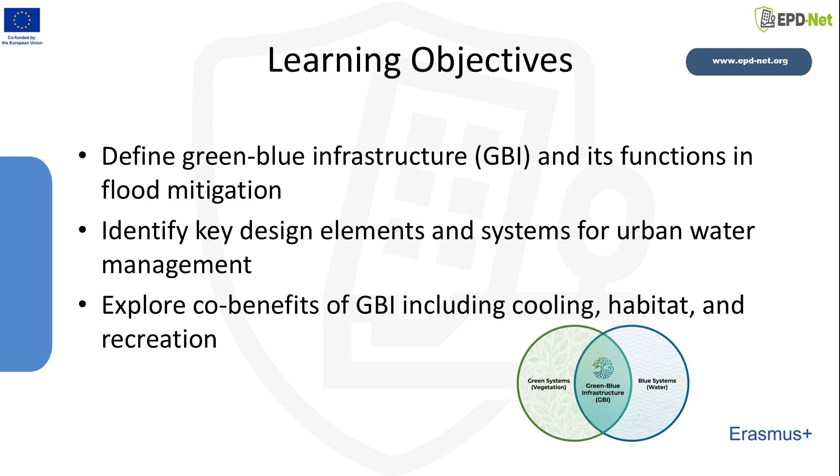Second, key design elements and systems for urban water management are identified. The integration of nature-based and engineered approaches is discussed in relation to contemporary flood control strategies.

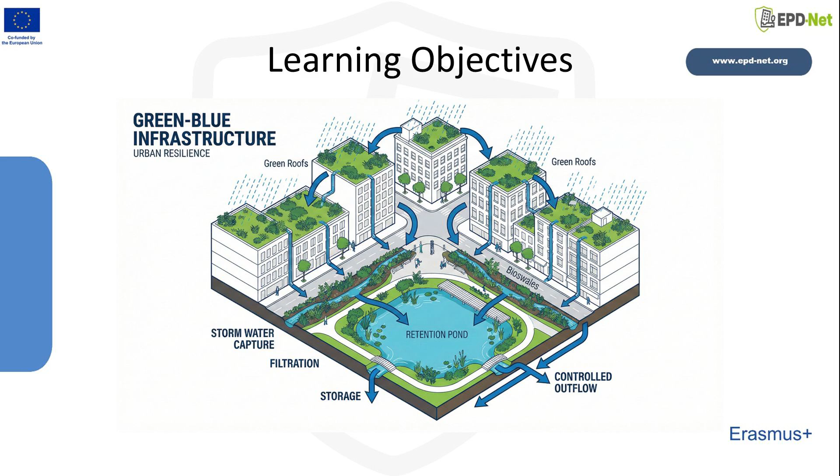Third, the broader co-benefits of GBI are examined, including urban cooling, habitat provision, and recreational value, highlighting its multifunctional role in sustainable urban development. This slide introduces Green-Blue Infrastructure, GBI, as a holistic approach to urban water management.

GBI deliberately integrates vegetated systems, green, with water-related features and management systems, blue. Instead of treating stormwater as waste to be rapidly conveyed away, this approach works with natural hydrological processes to slow, store, filter, and absorb water within the urban landscape. It represents a shift from conventional grey infrastructure, such as pipes and concrete channels, toward nature-based solutions that mimic ecological functions.

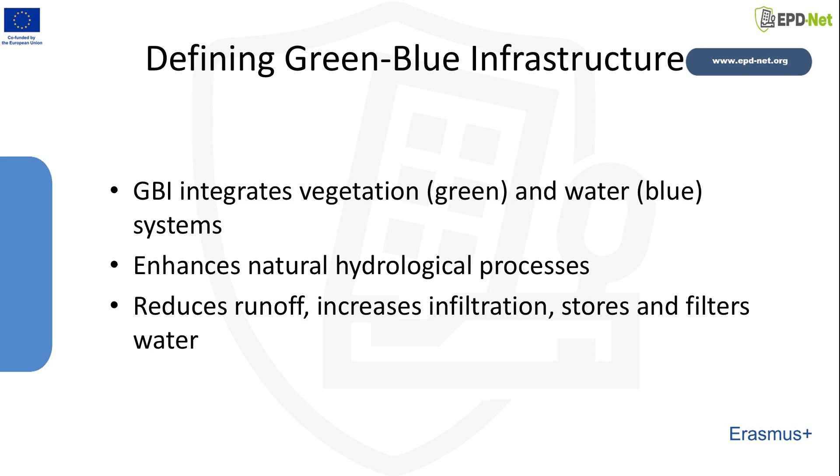The green component includes trees, shrubs, grasses, and wetland vegetation, as well as green roofs, bioswales, vegetated swales, urban forests, street tree canopies, community gardens, and parks designed with infiltration capacity.

The blue component consists of rivers, streams, and restored floodplains, along with retention ponds, urban canals, constructed wetlands, permeable surfaces that enable groundwater recharge, and rainwater capture and harvesting systems.

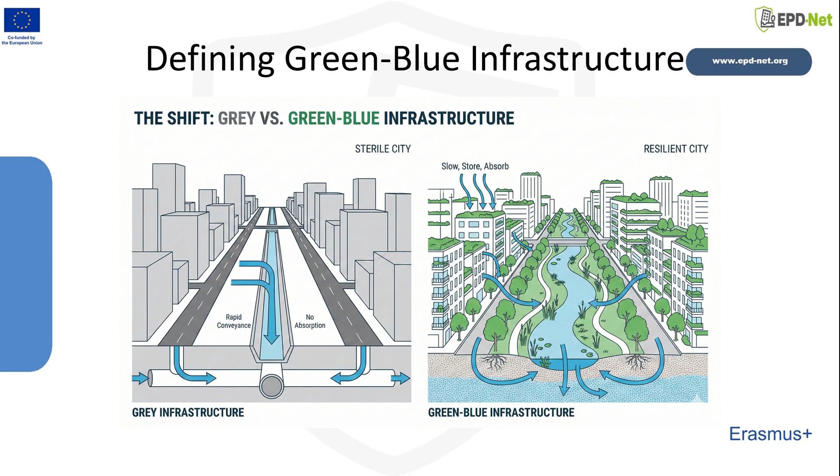Together, these integrated systems enhance natural infiltration, reduce peak runoff volumes, improve water quality, and generate long-term ecological and social value within urban environments. For much of the 20th century, urban water management was shaped by a convey and remove philosophy.

Stormwater was treated as a problem to be eliminated quickly through pipes and drainage systems. This led to the widespread construction of underground networks, concrete-lined channels, and engineered levees. Although effective in certain contexts, conventional grey infrastructure presents important limitations: high construction and maintenance costs, limited flexibility, and the absence of ecological or social co-benefits.

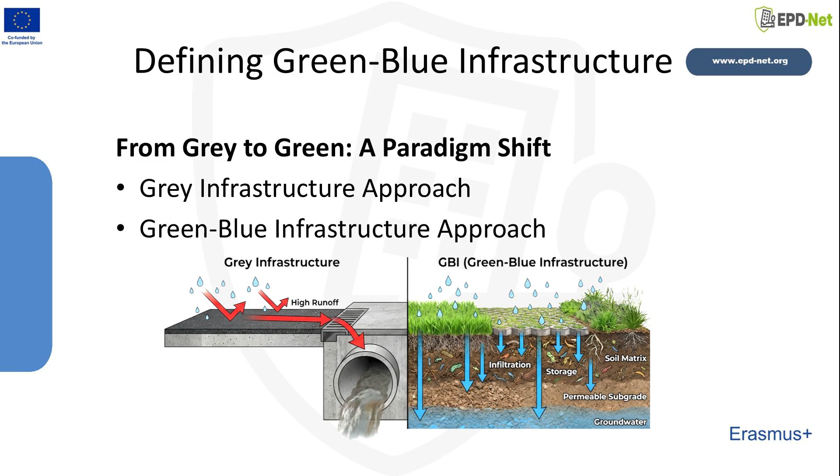The grey infrastructure approach rapidly conveys water away from urban surfaces and relies heavily on pipes, concrete channels, and underground storage tanks. Its capacity is fixed at the time of construction, making adaptation to changing climate conditions difficult. In addition, it contributes little to urban quality of life and may intensify the heat island effect.

In contrast, the green-blue infrastructure approach manages water at its source. It slows, stores, infiltrates, and treats runoff through the use of vegetation, soil systems, and integrated water features. Life cycle costs are often lower when long-term environmental and social benefits are considered. Beyond flood control, this approach delivers cooling effects, biodiversity enhancement, recreational opportunities, and well-being benefits. It is also adaptable, scalable, and suitable for retrofitting within existing urban areas.

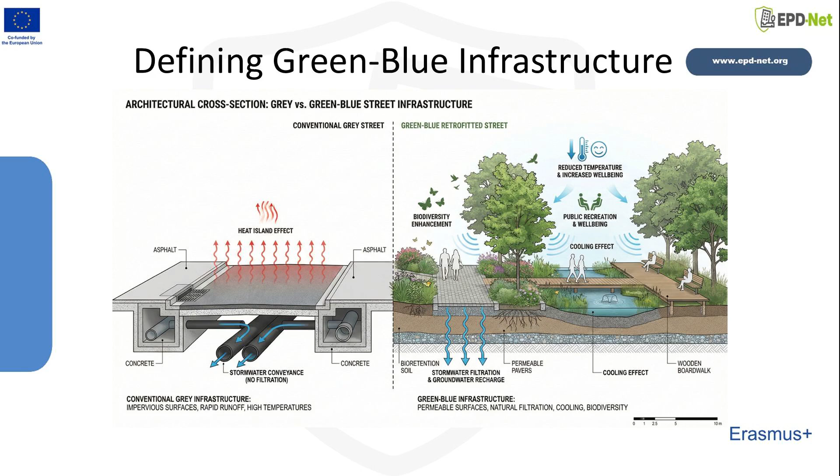The most resilient and effective urban water management strategies integrate elements of both approaches, combining engineered reliability with nature-based multifunctionality. While flood risk reduction is the primary driver for GBI investment, it is important to emphasize that the ecological co-benefits of well-designed systems are substantial. Municipal governments increasingly recognize these additional benefits as central to the overall business case for GBI.

These benefits extend across multiple urban systems, from public health and thermal comfort to biodiversity and urban food systems, which makes GBI one of the most multifunctional infrastructure investments available to cities today.

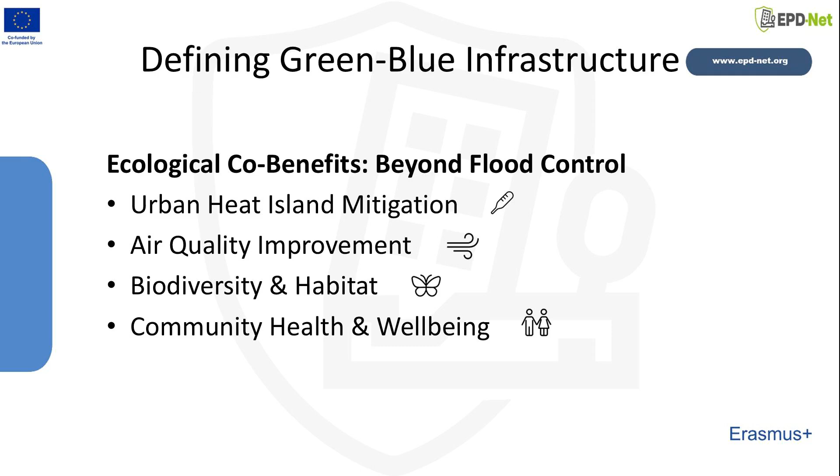Looking first at urban heat island mitigation, vegetation and open water surfaces reduce ambient temperatures through evapotranspiration and shading. Research indicates that GBI can reduce local surface temperatures by 2 to 8 degrees Celsius, which significantly lowers heat-related health risks and decreases energy consumption for cooling.

In terms of biodiversity and habitat, connected green-blue corridors function as ecological stepping stones. They enable the movement of birds, invertebrates, and small mammals across otherwise fragmented urban landscapes. Native planting within GBI systems also supports pollinators that are critical to urban food systems.

Regarding air quality improvement, vegetation in GBI systems captures particulate matter, absorbs gaseous pollutants such as nitrogen dioxide and ozone, and produces oxygen. This contributes to measurable improvements in urban air quality, particularly along high-traffic corridors.

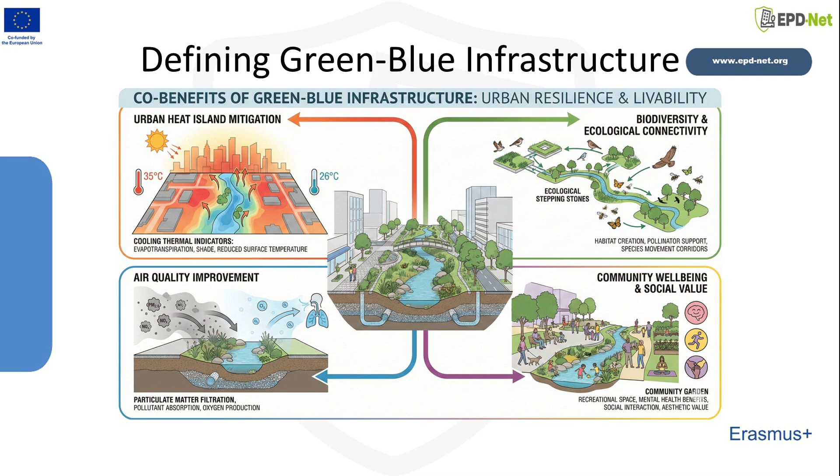Finally, community health and well-being outcomes are consistently linked to access to green-blue spaces. Evidence shows improvements in mental health, increased physical activity, and stronger social cohesion. In this way, GBI infrastructure creates public amenities that serve diverse urban communities across all demographic groups.

A well-designed GBI system relies on a diverse toolkit of landscape and engineering elements. Each element performs a distinct yet complementary function in managing urban water flows. These interventions can be implemented at multiple spatial scales, from individual buildings and parcels to neighborhood, city, and watershed levels.

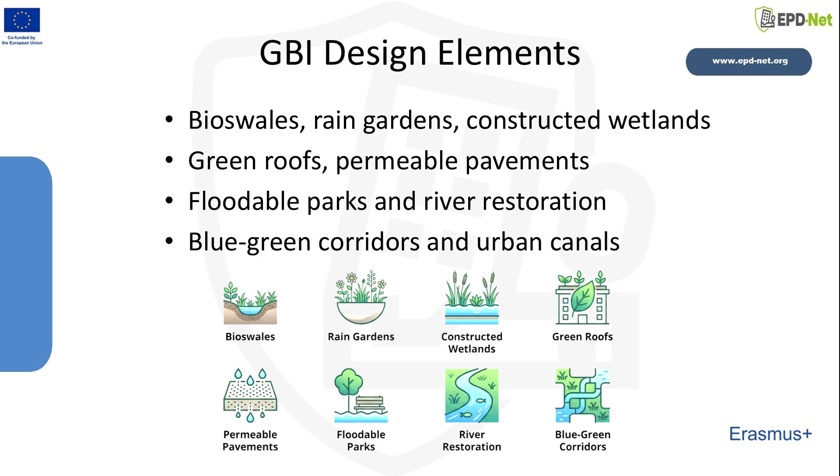Their effectiveness increases significantly when they are planned and connected as part of an integrated urban network rather than as isolated measures. This toolkit includes bioswales, rain gardens, and constructed wetlands, which slow, filter, and retain stormwater close to its source. Green roofs and permeable pavements contribute to on-site infiltration and reduce surface runoff in densely built areas.

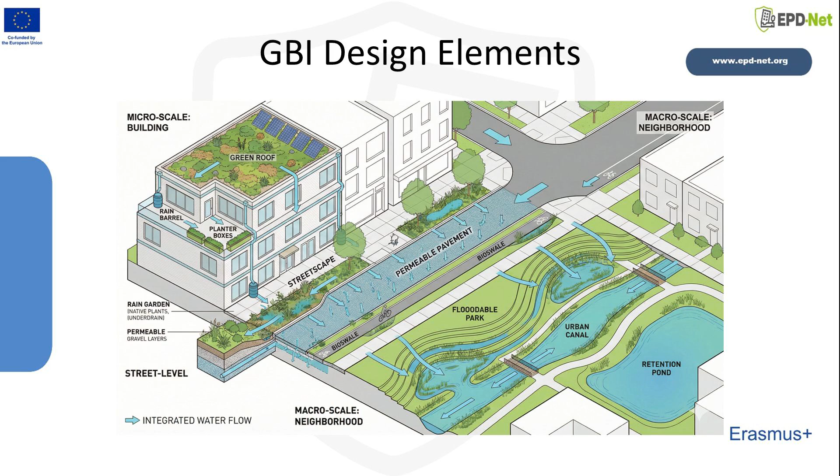Floodable parks and river restoration projects create space for water during peak events while enhancing ecological quality. Blue-green corridors and urban canals strengthen hydrological connectivity across the city and support both environmental performance and public amenity. Together, these design elements form a flexible and scalable framework for sustainable urban water management.

In this slide, the focus is on two key GBI design elements: bioswales and rain gardens, along with constructed wetlands. Bioswales and rain gardens can be understood as shallow, vegetated channels or bowl-shaped depressions. They are specifically designed to slow down, filter, and infiltrate stormwater runoff coming from roads, rooftops, and other impervious surfaces. In practice, they are considered among the most cost-effective GBI solutions, particularly in retrofit applications within existing urban neighborhoods where space and budgets may be limited.

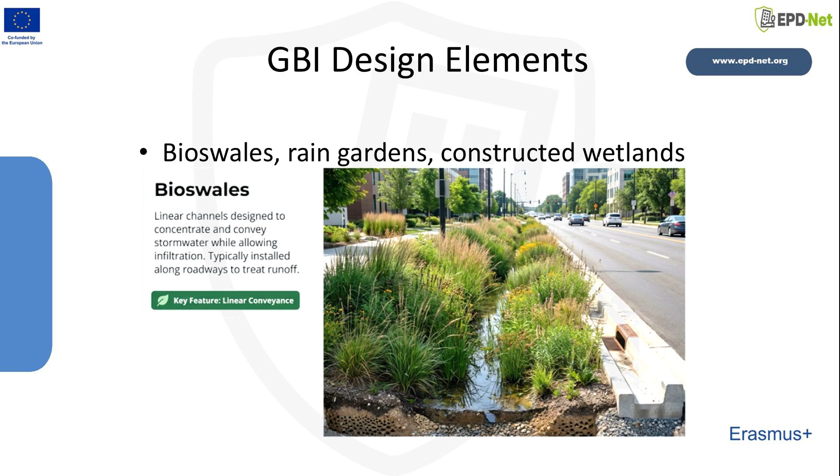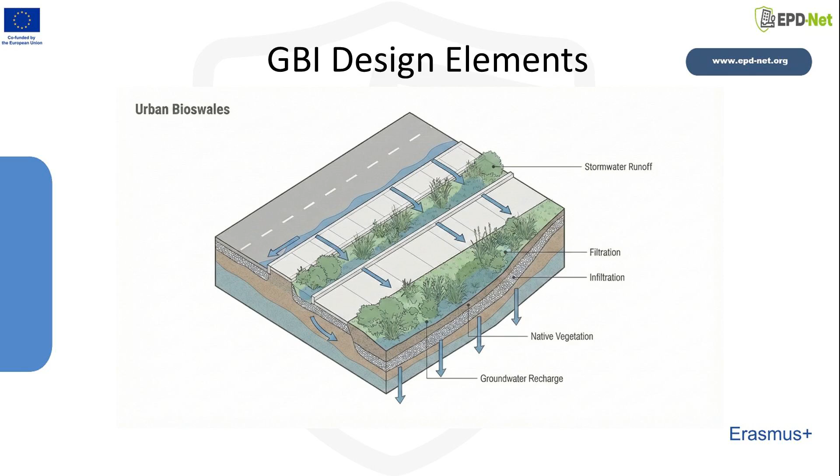Constructed wetlands, on the other hand, are engineered shallow water systems planted with emergent vegetation. Their primary function is water quality treatment. They remove nutrients, sediments, and pollutants from stormwater runoff before it enters receiving water bodies. At the same time, they provide significant habitat value for birds, amphibians, and invertebrates. In this way, they not only contribute to stormwater management but also actively strengthen urban biodiversity.

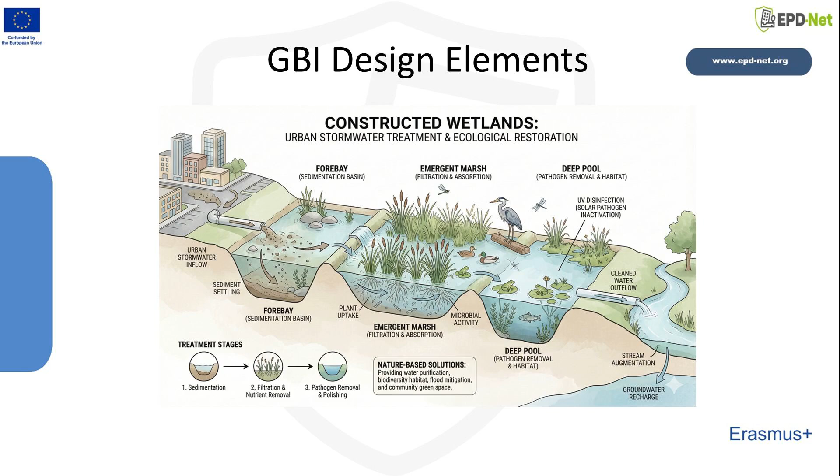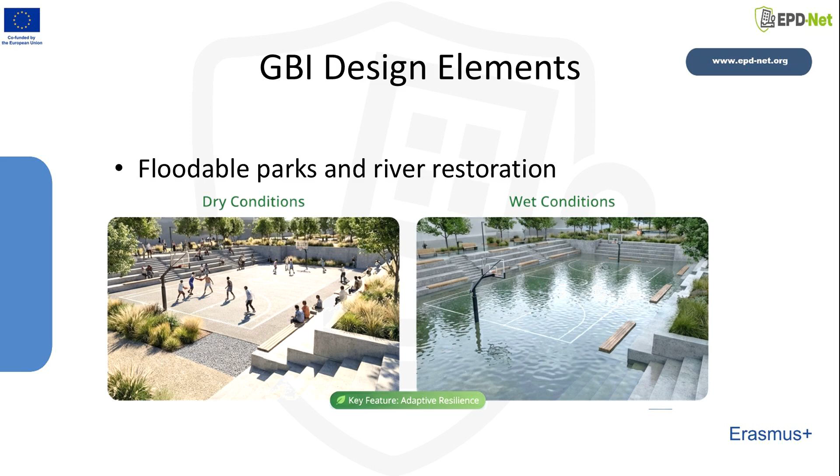In this slide, the focus is on floodable parks and river restoration as strategic components of green-blue infrastructure. Floodable parks are designed as multifunctional landscapes. Under normal conditions, they operate as recreational spaces used for walking, sports, and community activities. However, during peak rainfall events, these same areas temporarily store excess floodwaters. This reduces pressure on drainage systems and lowers downstream flood risk. Once water levels recede, the space drains and returns to everyday public use. In this way, a single intervention serves both hydraulic and social functions.

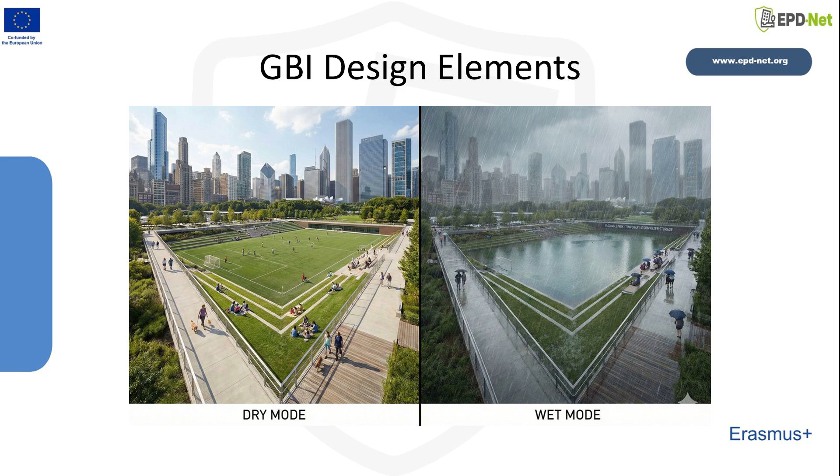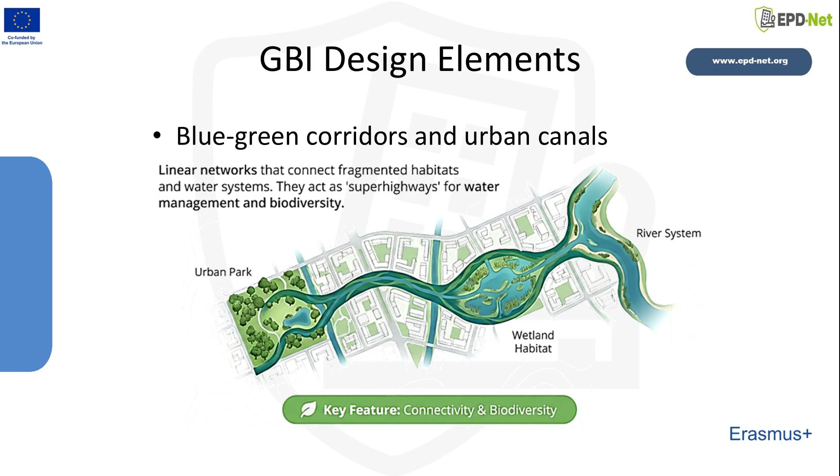River restoration complements this approach by renaturalizing altered or channelized waterways. Restored rivers reconnect with their floodplains, improve ecological health, and enhance overall hydraulic performance. Blue-green corridors then link these GBI design elements together. By connecting parks, waterways, and green spaces into continuous networks, they support integrated water management while also enabling biodiversity movement. At the urban scale, this networked approach significantly strengthens resilience and environmental performance.

The sponge city concept originates in China and has since been adopted internationally as a strategic planning framework for urban water management. It provides both a conceptual metaphor and a practical model for implementing green-blue infrastructure at the city scale. The core idea is that cities should function like sponges, absorbing, storing, purifying, and gradually releasing stormwater, instead of immediately channeling it into drainage networks.

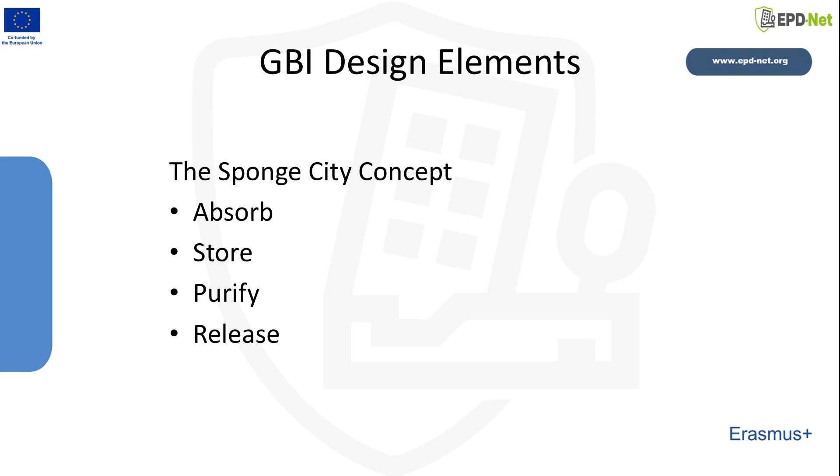This framework is organized around four key processes. First, absorb. Permeable surfaces, green roofs, and rain gardens capture rainfall at the source, reducing rapid surface runoff and relieving pressure on drainage systems.

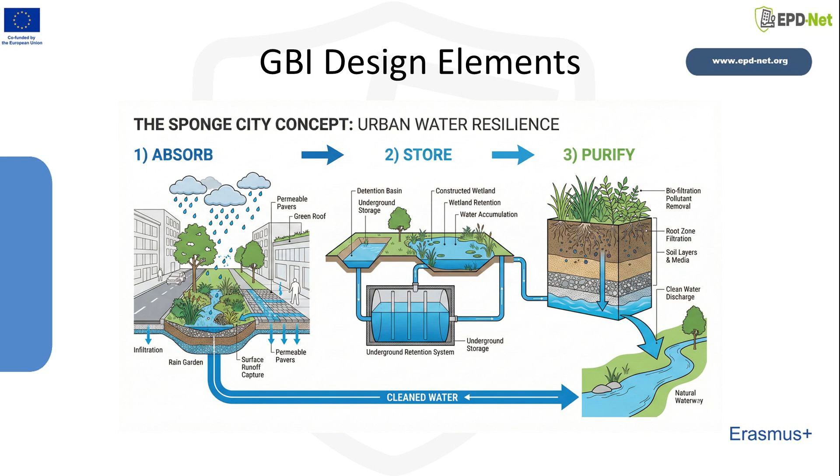Second, store. Retention ponds, wetlands, and subsurface storage systems temporarily hold water. This attenuates peak flows and allows water to be released in a controlled manner. Third, purify. Vegetation, soil layers, and microbial processes filter pollutants, nutrients, and sediments from stormwater before it is discharged or reused. In this slide, the focus shifts specifically to the benefits of green-blue infrastructure for flood control.

First, in terms of stormwater management, GBI slows runoff velocity. By reducing the speed and volume of surface water, it lowers the risk of combined sewer overflows and flash flooding, particularly in low-lying urban districts during intense rainfall events. Instead of overwhelming sewer systems, water is retained and managed closer to where it falls.

Second, regarding groundwater recharge, GBI increases infiltration across impervious urban surfaces. This helps restore groundwater levels and supports long-term water security. This function becomes especially important in regions that experience periodic drought conditions.

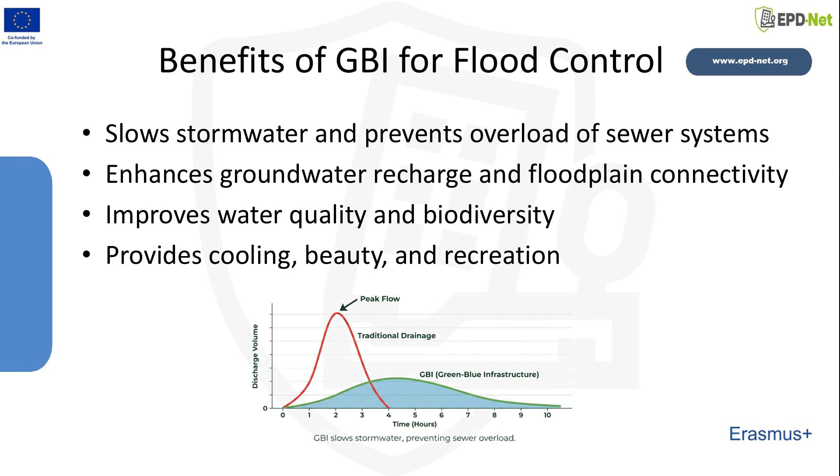Third, in relation to water quality and biodiversity, GBI systems filter pollutants, excess nutrients, and sediments from runoff before they reach receiving water bodies. At the same time, they create habitat corridors that support urban wildlife and pollinators, strengthening ecological networks within the city. Finally, cooling and well-being benefits should not be overlooked.

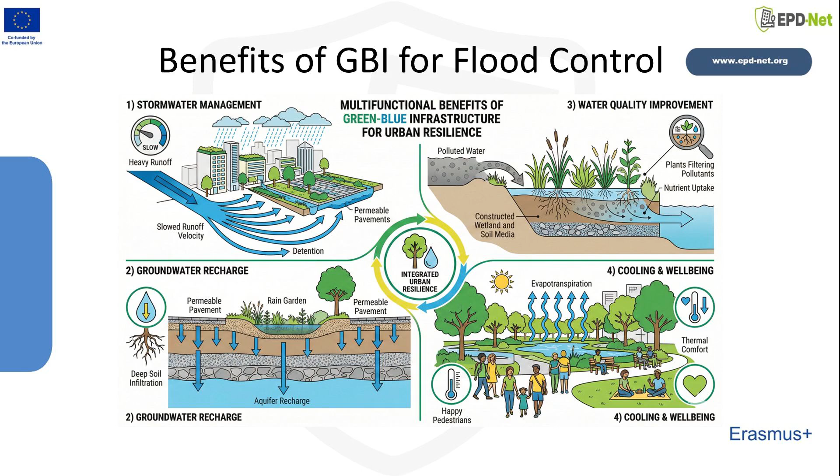Through evapotranspiration and shading, green-blue systems reduce urban heat island effects. In addition, they provide accessible green spaces that promote mental health, physical activity, and social cohesion. Taken together, these benefits demonstrate that GBI is not only a flood control strategy, but a multifunctional urban resilience investment.

Let us now examine a real-world example of green-blue infrastructure in practice: Chulalongkorn University Centenary Park in Bangkok. Bangkok is a low-lying city that faces significant flood risk due to intense monsoon rainfall, rapid urbanization, and limited natural drainage capacity. Instead of relying solely on conventional drainage systems, this park was designed as a large-scale nature-based solution for urban flood resilience. The park covers approximately 11 hectares and incorporates a carefully engineered topographic slope.

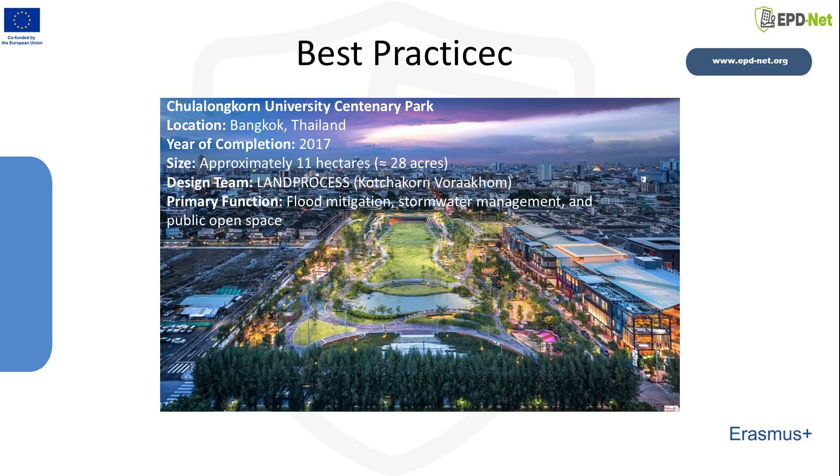This sloped landscape is intentional. It allows rainwater to flow gradually from the higher end of the park toward a large retention basin at the lower end. As stormwater moves through the site, it follows the sponge city logic.

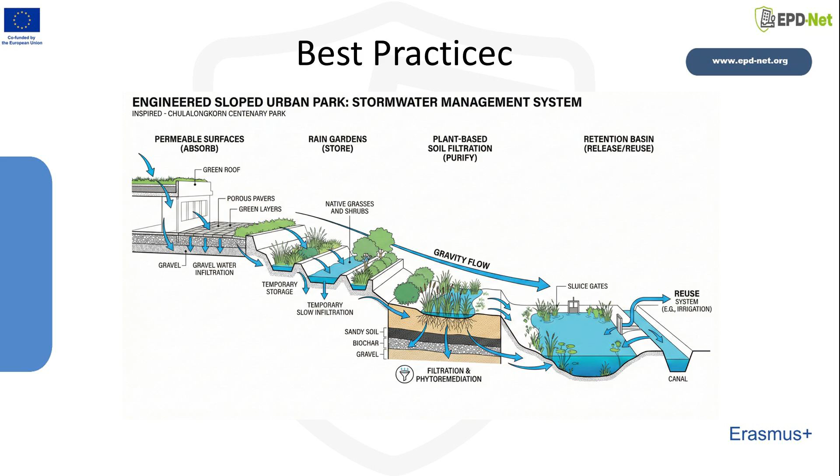It is absorbed by permeable surfaces and vegetated areas, it is stored temporarily within rain gardens and detention areas, it is purified through soil and plant-based filtration systems, and finally, it is released or reused in a controlled manner.

The park can store up to approximately 1 million gallons of stormwater during heavy rainfall events. This significantly reduces pressure on Bangkok's drainage infrastructure and mitigates flood risk in surrounding districts.

Beyond flood control, the project delivers multiple co-benefits. It reduces urban heat through evapotranspiration, improves biodiversity, and provides recreational and social space for students and the wider community.

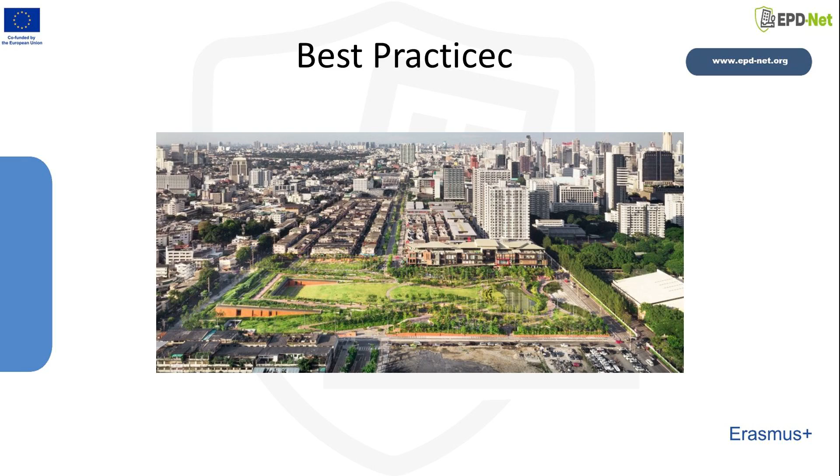Chulalongkorn Centenary Park demonstrates that green-blue infrastructure is not merely a technical drainage solution. It is an integrated urban design strategy that combines engineering performance, ecological restoration, and public space creation in a single multifunctional landscape.

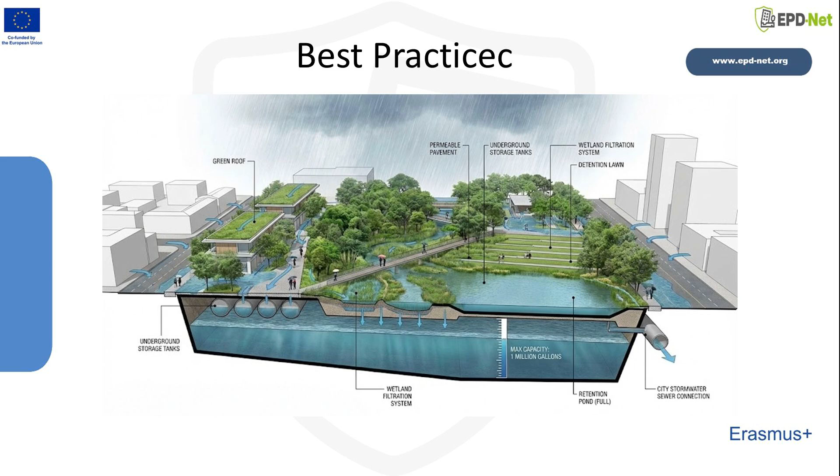The Sivas Kızılırmak River project adopts a terrain-sensitive watershed planning framework by integrating spatial datasets related to elevation, hydrological soil groups, permeability, erosion susceptibility, and land cover characteristics. Through the identification of hydrologically functional planning units, the project explores the relationship between slope conditions, runoff potential, and land use patterns within the Kızılırmak River basin.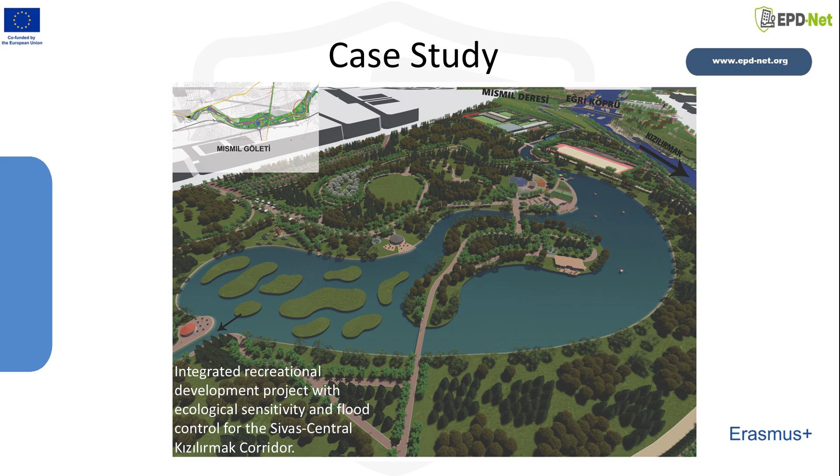Although the project focuses on a river corridor, its methodological approach is grounded at the micro-watershed scale. Accordingly, the ecological connectivity between the project corridor and the broader watershed system has been examined to assess the extent to which the corridor functions as an integrated component of the larger hydrological and ecological network.

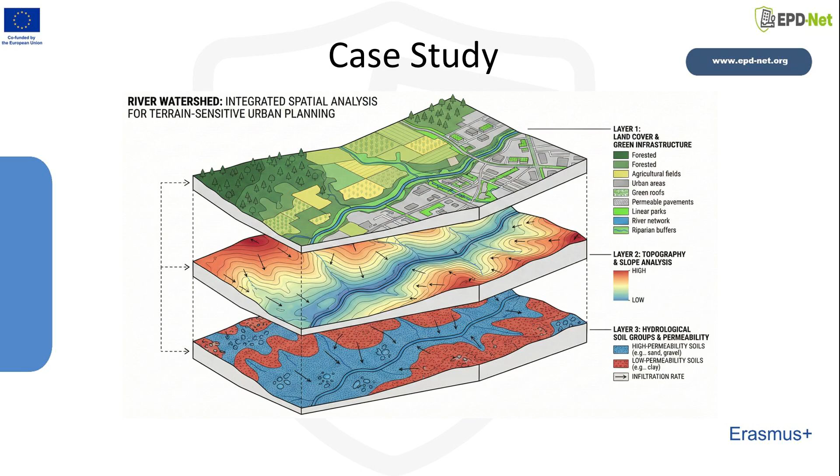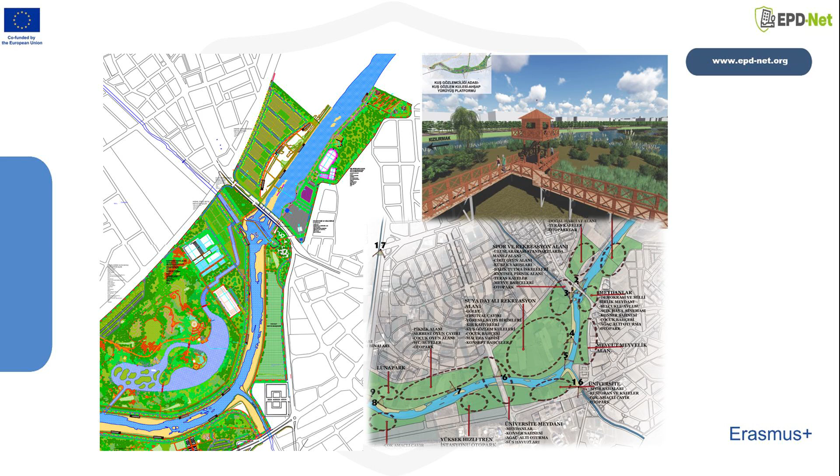Design interventions are developed in response to topographic constraints and surface flow regimes, prioritizing infiltration-supportive land uses in low-gradient zones and runoff control strategies in steeper terrain segments. The integration of riparian buffers and interconnected green infrastructure systems enhances hydro-ecological continuity while mitigating localized flood risks and soil erosion. These terrain-responsive design measures further support microclimatic stabilization by increasing surface permeability and evapotranspiration potential across the watershed landscape.

To conclude, this slide summarizes the key takeaways from the discussion on green-blue infrastructure. First, green-blue infrastructure can be understood as a nature-based solution for resilient flood management. Rather than relying solely on conventional gray systems, it works with natural processes to manage stormwater at its source, reduce peak flows, and restore elements of the natural water cycle within urban environments.

Second, GBI represents a meaningful integration of engineering and ecology. Effective implementation requires interdisciplinary collaboration, bringing together hydrological engineering, landscape architecture, ecology, and urban planning into cohesive, context-sensitive designs.

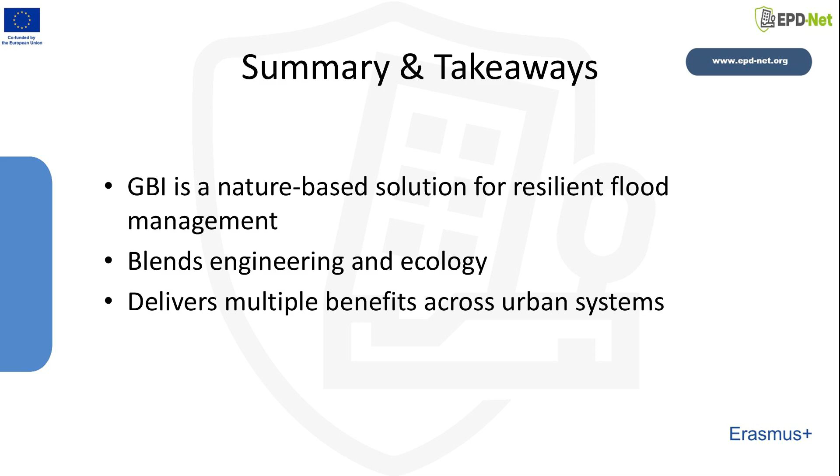Finally, GBI delivers multiple benefits across urban systems. Beyond flood control, it contributes to urban cooling, biodiversity enhancement, improved water quality, public health, and recreational opportunities. For this reason, it should be viewed not only as drainage infrastructure, but as a high-value investment in long-term urban resilience and sustainability.